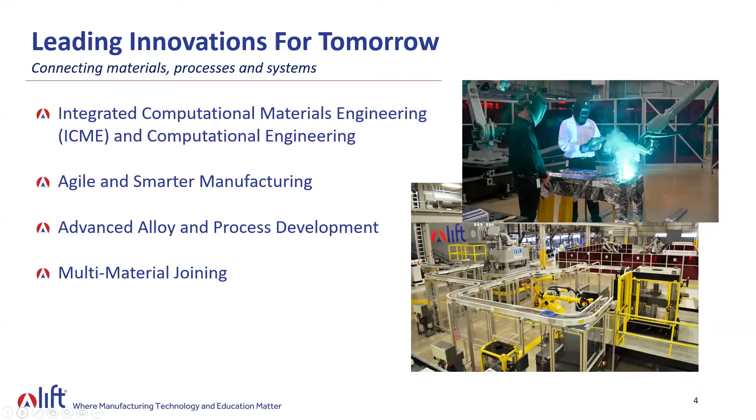Everything from integrated computational materials engineering to agile and smarter manufacturing, advanced alloy process development, multi-material joining. You can see on the screen here, I won't get into each of these, but these are deeper dives into each of those pillars and kind of where we and our ecosystem operates.

So we invite you to come to our facility when it's safe to do so, visit with our technicians, reach out to us and talk to our engineers, learn about what we're doing here, and to really take innovations from research across the Valley of Death and into commercialization.

On the talent side, Learning Innovations for Tomorrow, it's still about innovation and new learning tools, pathways, and venues. It revolves around our Ignite Mastering Manufacturing curriculum, available for high school students in our Learning Lab and around the country. You see the Learning Lab photo there. It's perched above our high bay, where before the pandemic, we had about 120 students each and every day coming to participate in our facility and in our Ignite curriculum.

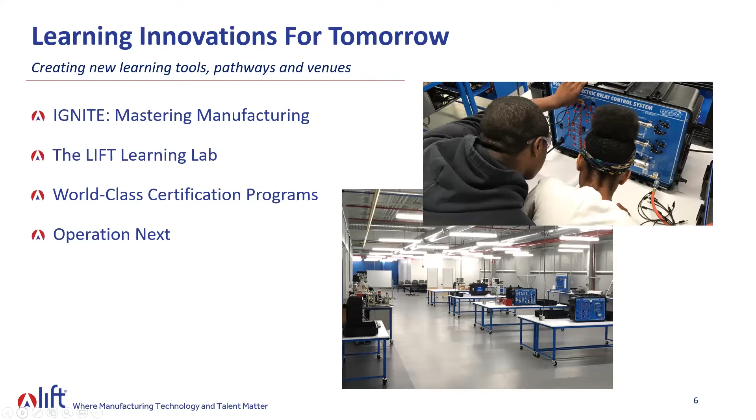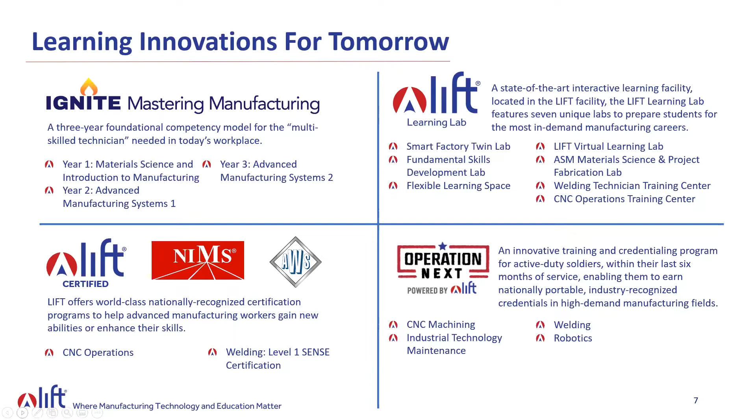We're also offering world-class certification programs - welding, CNC, industrial technology maintenance, and robotics - both through our LIFT certified program and Operation Next program, which is growing beyond just a military program where we're supporting separating men and women from the military, providing them opportunities to earn credentials before they leave the service. We're piloting that in industry right now in response to the pandemic, continuing to train and educate folks going forward.

So I mentioned we are a membership organization, nonprofit 501c3 based here in Detroit. So what do members get from becoming a LIFT member? Well, everything here on the screen. I won't get into each of those today, as I know we want to get into the presentation, but we'd be happy to talk to you about any of those - from our trusted advisorship to our technology and talent development, our showcase, which I hope you guys can come visit soon in Detroit, connecting. But we are here to connect and convene.

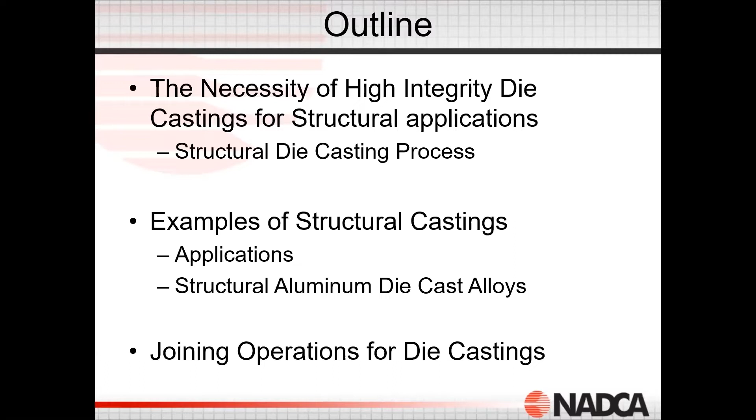Today my outline, what I'm going to review is why do we have to have structural die castings? What's driving the need for structural die castings in the industry? I'm going to talk about some examples of those structural die castings, some applications and specific castings. And then when we're looking at structural die castings, one of the benefits is in joining operations, in hooking those castings up to other components.

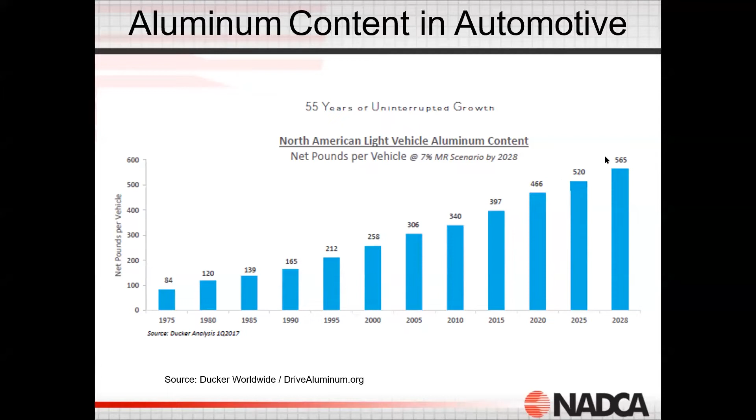So the need for structural die castings comes from several sources. One is just the lightweighting and aluminum content. We can see on a graph like this from Ducker that the amount of aluminum in vehicles is ever increasing past 2020, 2021, all the way to 2028. So castings are necessary in making vehicles lighter. So we see that aluminum content increasing, and then we see that aluminum content in various structural components inside the vehicle.

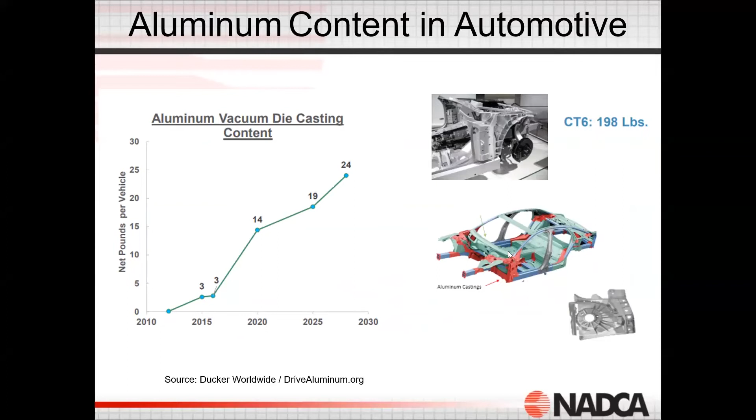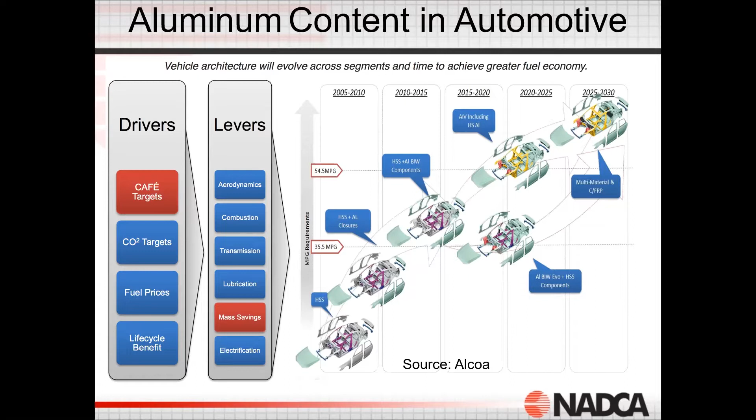And then within that, we also have CAFE targets. Those CAFE targets are requirements from summits or from legislation that happened in 2012, increasing the miles per gallon of the entire fleet. So in reaching those CAFE targets, they've got to make the vehicles lighter. So we have the aluminum content increasing, we've got the vehicle getting lighter and lighter, but the strength, durability and reliability of the vehicle in a crash environment still has to take place.

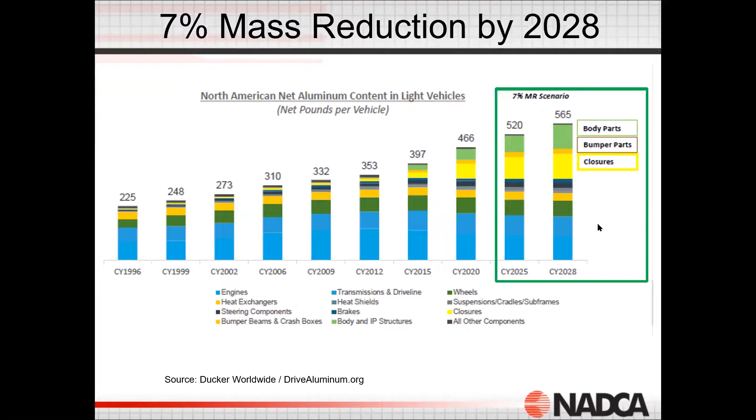So with that, we have an overall reduction in mass of 7% targeted by 2028. This goes back to that number of pounds in a vehicle, pounds of aluminum, and we can see where that's coming from - the engine, transmission parts, brakes, wheels, and all other components. Within this, we have the structural components, which make up a large majority of growth components in the die casting environment being applied to vehicles.

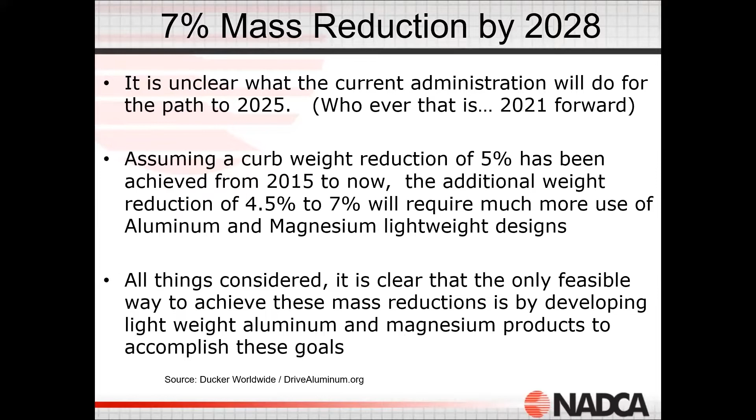So it's unclear whether the current administration is really going to take hold of this and how that's going to drive us to 2025. But the past legislation from 2012 is still in place. That hasn't changed under the previous administration, and it's not changed under the current administration. So as we move forward, we have to see these targets, because those CAFE requirements are ever looming, driving us to reduce the weight of the vehicle and increase the miles per gallon of the vehicles. So that's what's kind of driving us forward, making more products into structural die castings.

So what is a structural die casting? I want to get into the process. When we're talking about structural die castings, we're not just talking about a standard die cast process. We're talking about a die cast process that then has additional parameters and items in it that make a structural die casting what it is.

So the first is going to be high vacuum. In a structural casting, we're going to have high vacuum capability, and this type of process needs to be able to achieve a vacuum level of about 50 millibars to 100 millibars. With that kind of vacuum draw, we're eliminating a lot of the air inside the system. We've got to be able to monitor that, and monitor it in real time.

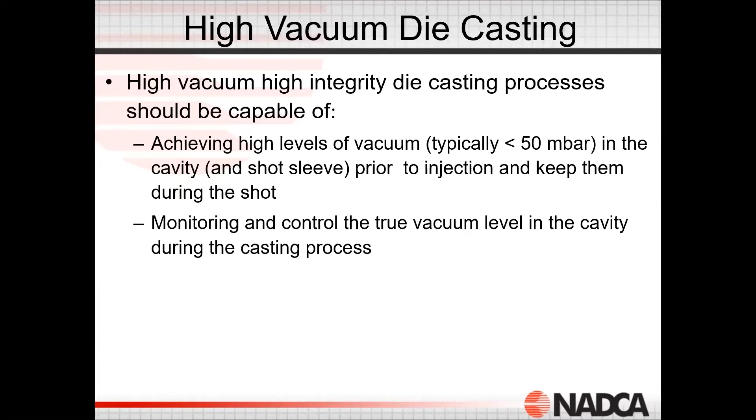So when you're making a die casting, you're injecting the aluminum at high velocity. You can fill a casting, whether it's 2 pounds or 75 or 80 pounds, in a time frame of about 49 milliseconds to about 90 to 100 milliseconds. So in 0.1 seconds, we're filling a 70-pound die casting. That injection speed is very rapid, and solidification takes place very rapidly. So we've got to have systems that are able to monitor and control not only the shot parameters and all the other parameters of the die cast process, but the vacuum systems and humidity control or monitoring systems as we inject the aluminum into the die cast machine.

When we produce a casting from a high vacuum process and produce a structural casting, these castings have extremely low levels of porosity. These castings can be solution heat treated without blistering. They're weldable. They have good uniform mechanical properties.

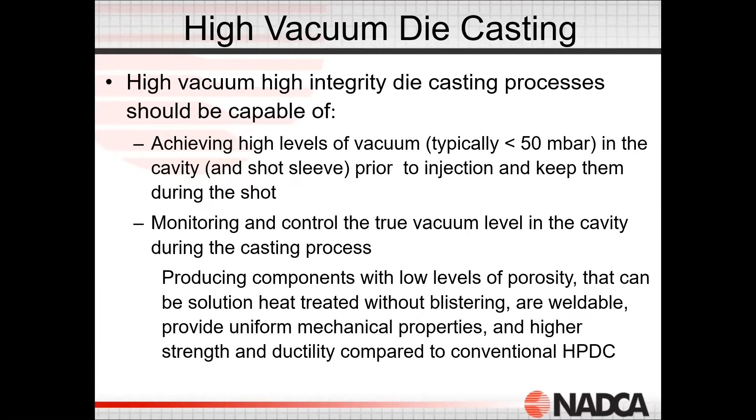They have higher strength as compared to standard high pressure die casting. So we get some good mechanical properties, and ultimately they have better elongation. With that better elongation, they have durability in crash tests, bending instead of breaking and snapping. So why use vacuum die casting?

We want to reduce the gases in the shot sleeve and in the cavity, thus reducing porosity levels and improving mechanical properties, making them heat treatable. We want castings with uniform and very small wall thicknesses, meaning 3 to 5 millimeter walls, so we can get the same type of strength, durability, and elongation out of a casting with a 5 millimeter wall as one with a 10 or 12 millimeter wall.

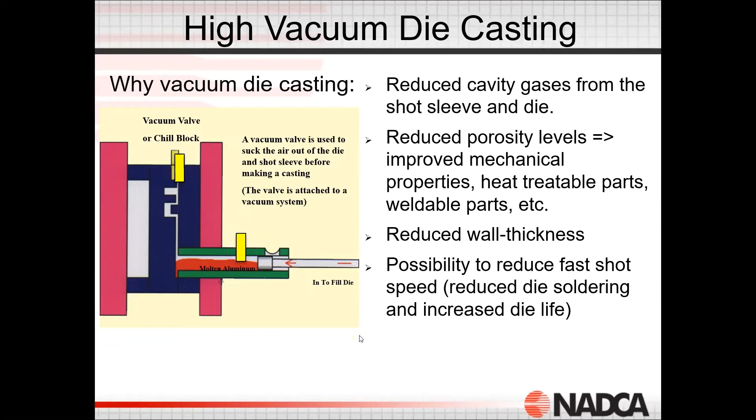Ultimately, we want to be able to produce these aluminum castings out of various aluminum alloys. There have been structural alloys developed for the entire process to give us unique properties based on the alloy within this high vacuum process.

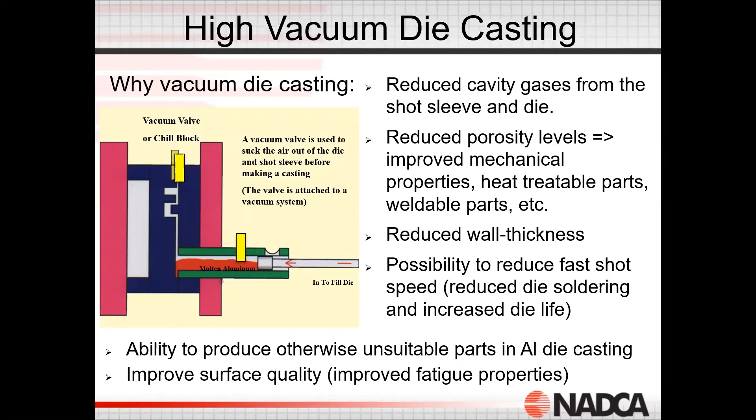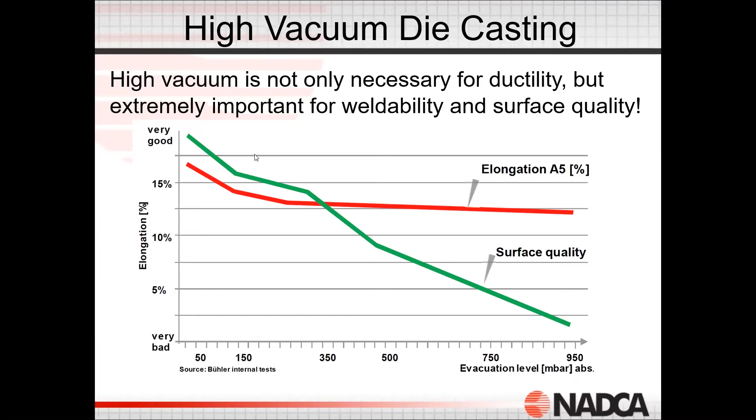This is a graph showing the elongation value, higher elongation over the evacuation level. We can see that if we don't get good evacuation levels of the gases, so we have low vacuum or vacuum assist, we get lower elongation values, whereas we get higher elongation values with very low evacuation pressure. This is a higher vacuum level, and this is a lower vacuum level. The better the vacuum in our molds, the better the elongation from the alloy, plus the individual alloy properties, which we'll talk about in a little bit.

Ultimately, we have a die cast process, and this is called a shot profile. With this shot profile, we're taking a fingerprint of the individual shot that's making an individual die casting. We have the slow shot injection speed, and then we start the vacuum. We draw the vacuum, and by the time we reach the end of slow shot, we've achieved a 50 to 100 millibar vacuum.

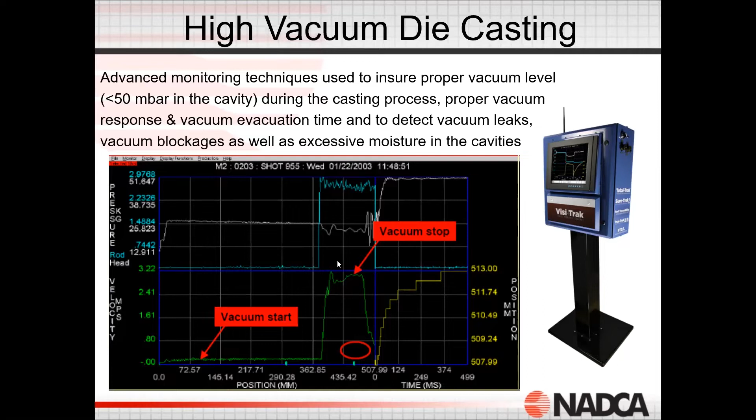Then we enter into fast shot. We have to stop the vacuum as we reach the end of shot so that we're not filling the vacuum systems, and then we enter into an intensification phase. We look at these shot profiles and we can tell whether we're getting a good casting. Within those profiles, we can not only measure the vacuum levels and the shot, but we can also measure the humidity levels, so we can actually determine if we have excess humidity creating porosity in the die casting.

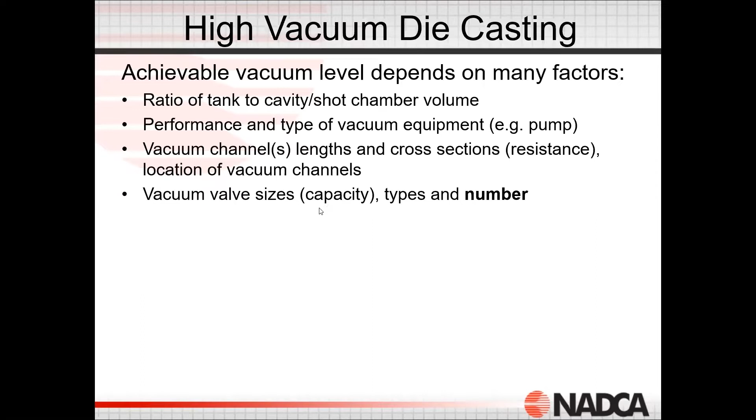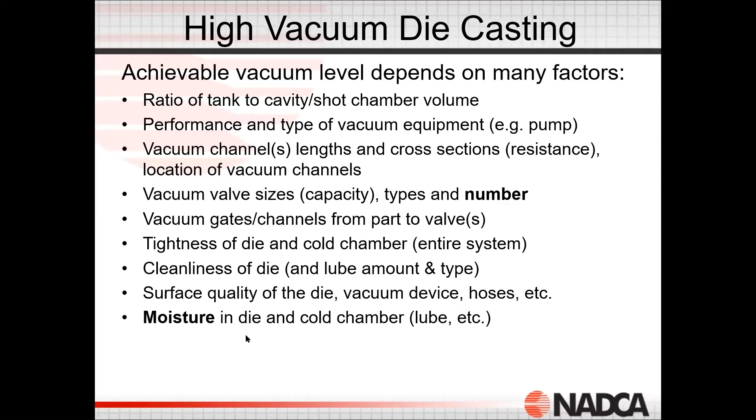We've got to have vacuum systems, runners, lengths, and vacuum valves all capable of removing that air very rapidly while we're filling the casting, to make sure we have a very tight process. We also have the entire tool sealed. The tool has to be clean, meaning it can't have any die lube or any excess liquid inside the machine while we're making the die casting. This is the moisture in the die, and when we're controlling that moisture, we have the tool completely sealed.

This is a side view cutaway section of a die cast die. This is what we call the cold chamber or the shot sleeve. The metal is put in here, and I'm going to show you this in more detail in a minute. The metal is injected, and this becomes the cavity. We can see all of these seals. These die seals are necessary if we're going to seal this tool.

When we draw a vacuum, we're not just pulling in outside air and replacing the internal air of the cavity with external air from the outside world. We've got to have all of the components sealed, the entire tool, and all the moving components in what we call the ejector half. These seals are important to keep out moisture, and they're important to keep out any air from being drawn into the cavity.

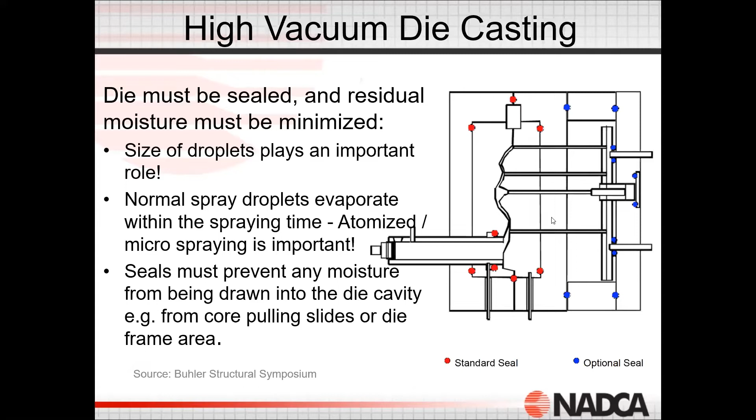This is once again a fingerprint, actually a snapshot of the vacuum system in operation. So here we're not only looking at the humidity level, we're looking at how well we're drawing a vacuum. We turn the vacuum on, draw it down, and we're achieving about 50 millibars in this particular die, and each one of these is a shot, a die casting being made. We're monitoring the vacuum level and the humidity level, and these humidity sensors are located at each vacuum point.

Once again, a distinction between structural die casting and vacuum assist or normal die casting is that structural die casting can have multiple vacuum points. So we're going to have 2, 3, 4 vacuums inside of a mold, all drawing vacuum on the same mold, all measuring humidity. We can see the humidity sensors at each vacuum point, and we can measure the vacuum level.

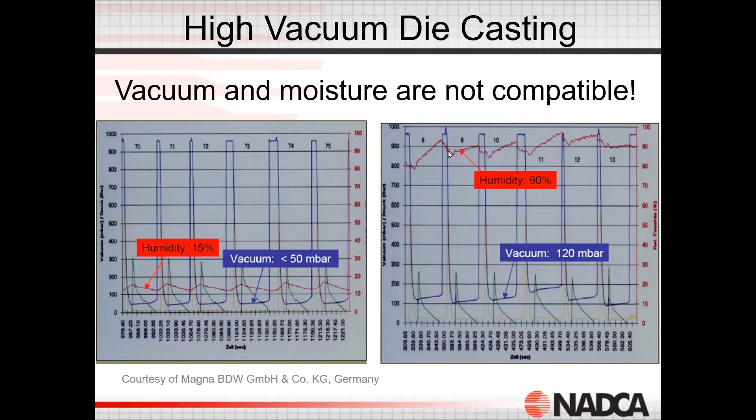So here's the different running criteria. Here we're achieving about 120 millibars of vacuum, once again much higher than here, and we can see our humidity level is around 90%. If I were to see this, I would say I've got a water leak or excess lube. Any humidity of this level is going to create porosity in our castings. Once again, if we can't measure it, we can't control it. So if we're measuring humidity, we can see the difference of 15% to 90%. We're now producing a casting that may have detrimental effects or excessive porosity, giving us blisters and defects.

So we can see that this low gas porosity is very key in making good weldable seams in our joining operations. We're just showing the difference between different types of vacuum systems. This is a high vacuum system, this is a conventional vacuum system, and this is without any vacuum. We can see not only the type of air that's entrained in the casting, but the amount of air in these x-rays. These conditions are going to give us a good weld seam. This is actually the weld seam we're looking at, from the different processes.

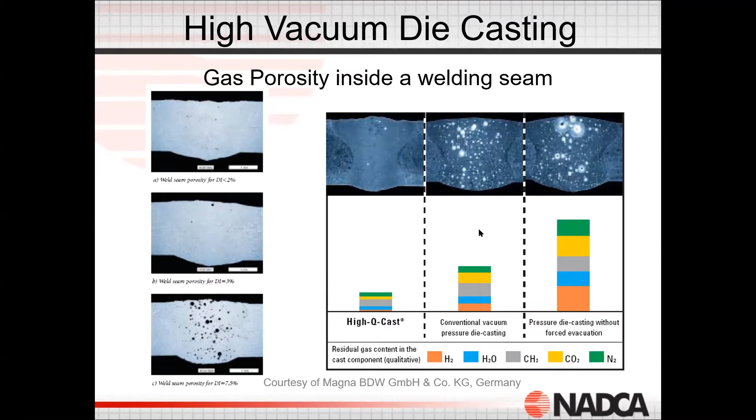So here's how the process works. Through the next set of slides, I'm just going to illustrate the process. We have metal, the red here indicating the material, the aluminum material. It's entering in what we call a cold chamber or shot sleeve. As it enters into that shot sleeve, it fills it to a level - we call that our fill percentage. We then start the piston forward.

This is the injection piston. As the piston covers what we call the pour hole and closes it, we then turn on the vacuum system. We have a vacuum system on the chamber or shot sleeve, and then a vacuum system in the mold going to vacuum tanks. So we have a large vacuum reservoir that we turned on, and this is now moving forward - the metal is moving forward into the cavity. As we pass this point where the vacuum in the chamber is, this vacuum is shut off, and we have these vacuums in the die still on.

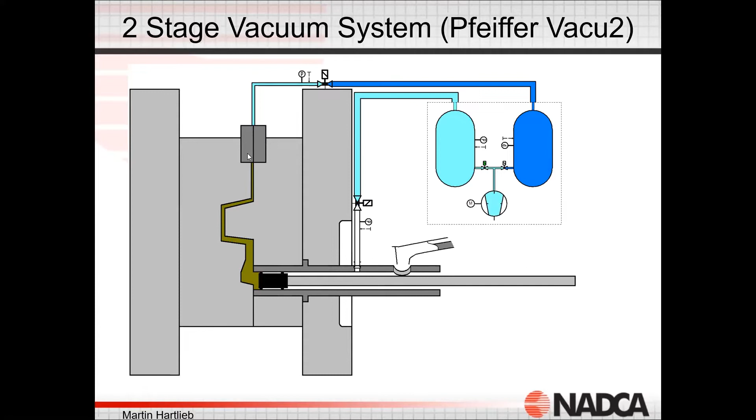So we're still drawing vacuum here, this one is turned off. The metal is now entering the cavity shape, fills the entire cavity shape, and then the vacuum system turns off as it reaches the top vacuum point. There are several ways that's achieved. With that vacuum off, the mold is now filled, the casting solidifies, and we pull the casting out of the mold, and the process repeats. So that shot fill time, once again, is between 0.049 seconds to about 0.09 seconds or 90 milliseconds - very rapid filling.

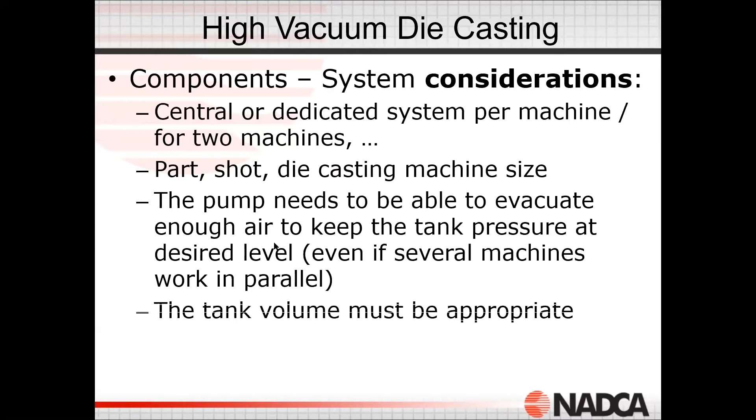A lot of considerations need to be taken into account when we're casting these parts - what kind of machine we're going to cast it in, what's our part, our shot, our die casting machine size, what kind of pumps do we need to evacuate that amount of air. So based on the volume of the casting, whether we're making a small casting or a very large casting, we have to have this thing sized appropriately to be able to pull all of the air out of the process. And once again, we've got to have the shot sleeve evacuation.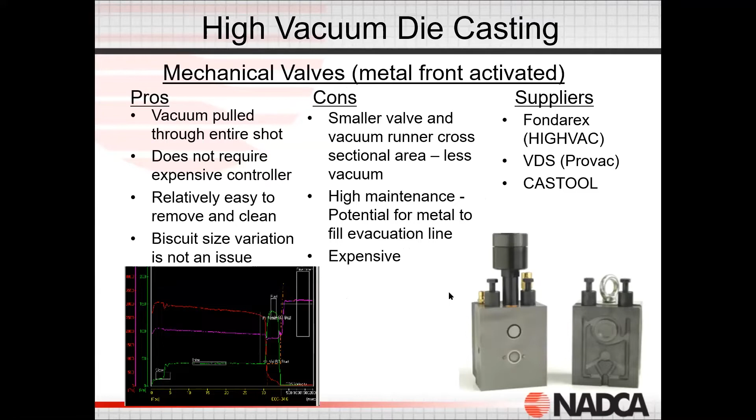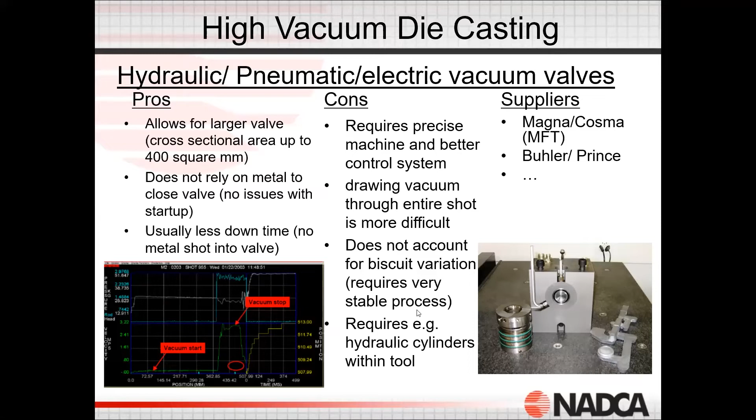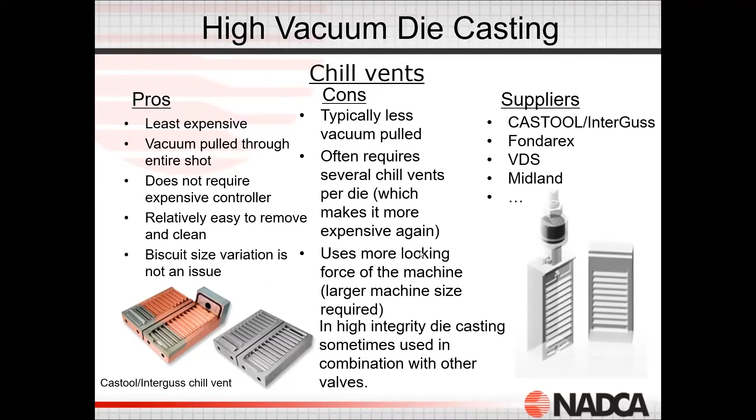So here's some valves that are used. These are vacuum valves, and there are several different types. There are metal front valves, there are poppet valves - each one of these are different vacuum systems. There are different pistons for injection. There are blocks that are called chill vents that we have vacuums attached to. So all of these are different systems for removing the air from the die casting.

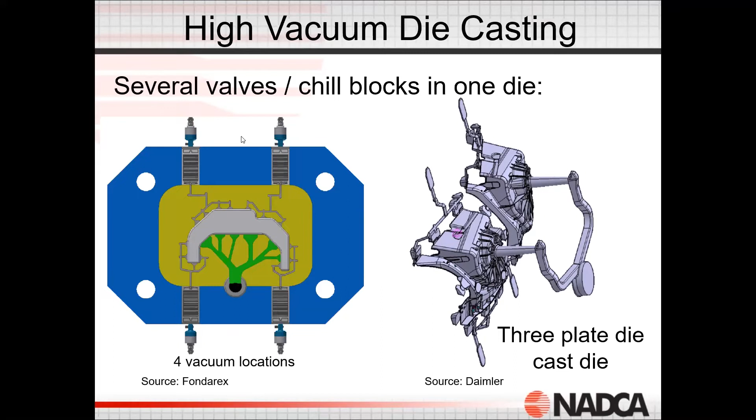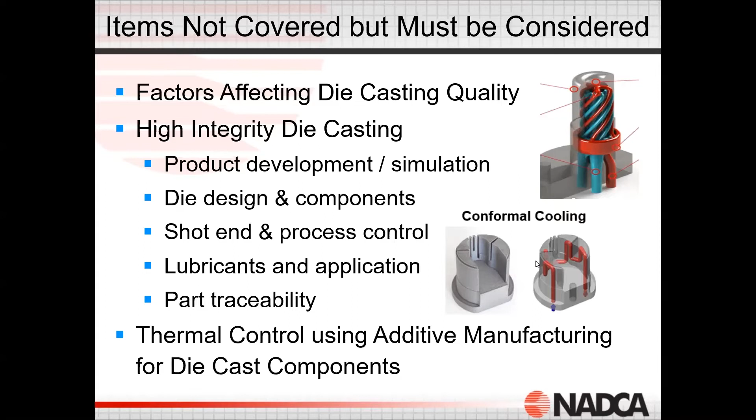And then we've got to have some sort of thermal control. We utilize that thermal control by using additive manufacturing. So whether we're using additive in a shot block or in a core, we're printing these, and we're actually printing the cooling lines at various shapes and sizes to facilitate the cooling and thermal control inside the casting to eliminate different types of porosity that are going to exist.

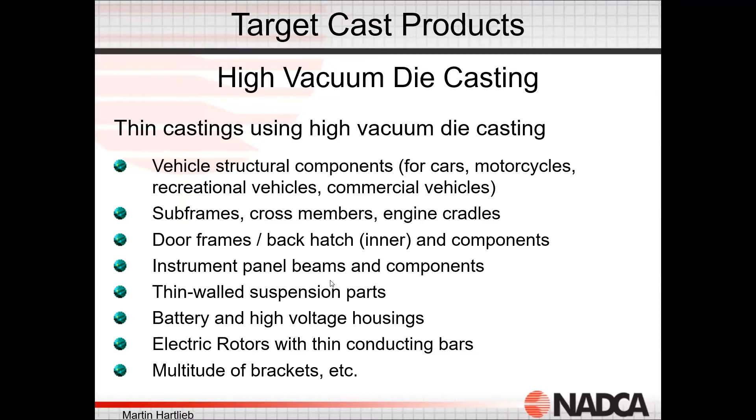Examples of die castings being used include vehicle castings, for cars, motorcycles, recreational vehicles - subframes, cross members, engine cradles, door frames, instrument panels, thin walled suspension parts, battery and high voltage housings. For the EV market, electric rotors, and then there's a multitude of brackets. This is a list of castings being produced as structural castings today.

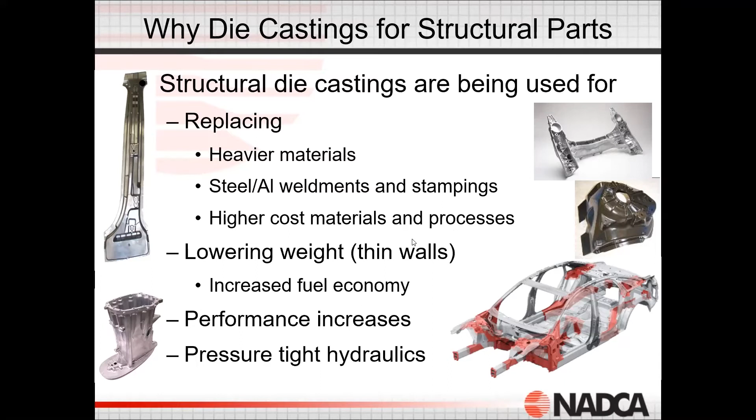Some of the advantages of structural castings is that we can replace heavier materials - stampings and other steel type materials, or steel aluminum weldments. We can replace other high cost materials with lower cost, lower weight, thin wall aluminum die castings. So we get better performance and better pressure tight castings with this type of process.

Remember, these castings have high elongation, so in a crash we're going to see these castings buckle and not break. These castings have very thin walls.

We then integrate several different parts into them, and I'll talk about that in just a moment. These have good mechanical properties, higher than normal die castings, giving us good crash performance. They can be welded, they can be riveted, they're distortion free with tight tolerance, and with some of the alloys being developed for structural applications, they have great corrosion resistance, and obviously pressure tightness.

Here's an example of an Audi B-pillar. This used to be 8 different parts weighing about 9 pounds; making it into a structural die casting, it now weighs about 5 pounds and is one casting - eliminating the assembly operation and all the other components.

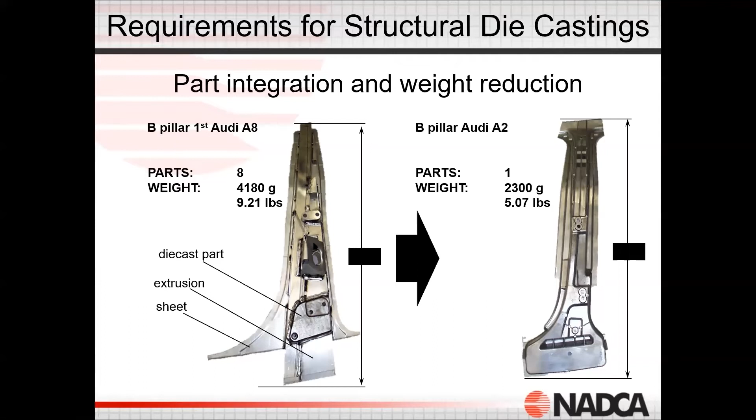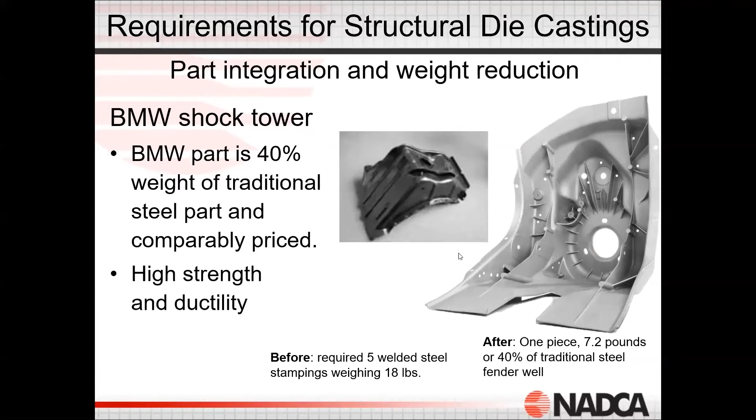Here's a BMW shock tower. This was traditionally 5 welded steel stampings weighing about 18 pounds. As a die casting, it's now 7 pounds and a single piece, so it's 40% of the weight of the traditional welded part.

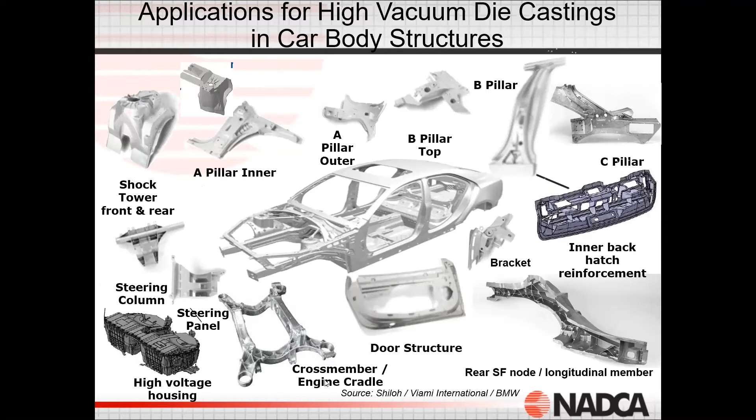Here's an overview of all the different components being die cast today as structural die castings. So not only do we have the shock towers and B-pillars I just showed, we have A-pillars, C-pillars, inner back hatch, brackets, door structures, cross members and cradles, high voltage battery housings. All of these are being cast today as structural die castings, replacing other traditional components.

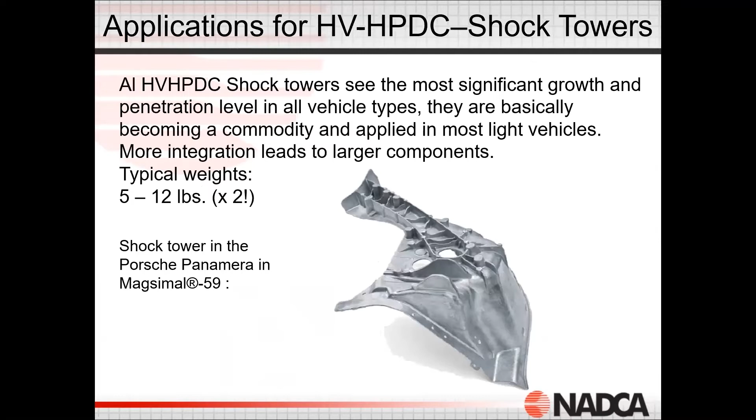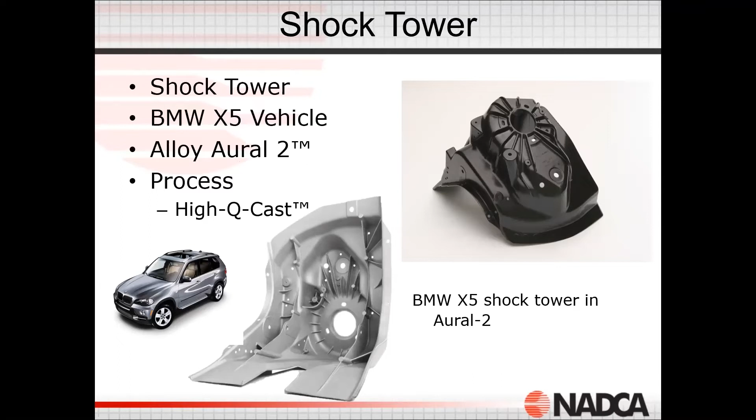The alloys now being used - this is an Aural 2 alloy. As I mentioned, there are several alloys that have been used for several years, and there are also alloys in development to enhance the properties of structural die castings. Here's 2 different alloys: this is a Castasil 37 made by Rheinfelden, and a Silafont 36, both structural die castings replacing stampings.

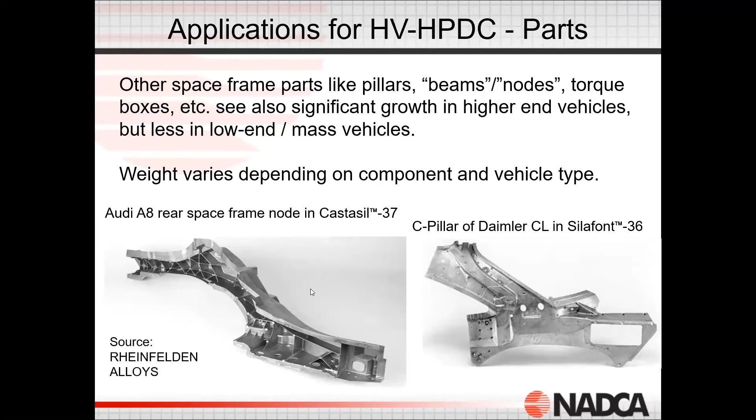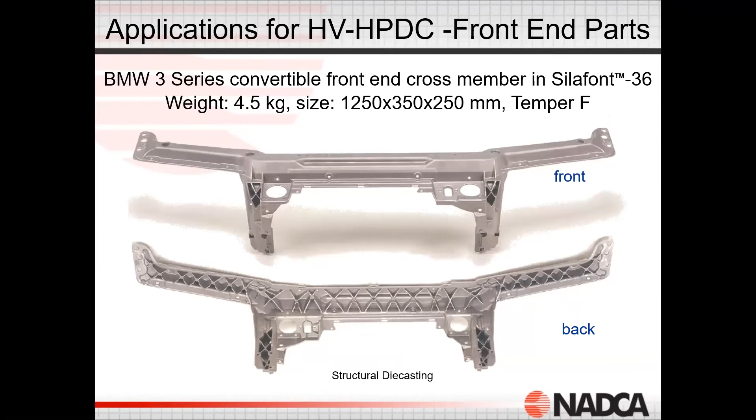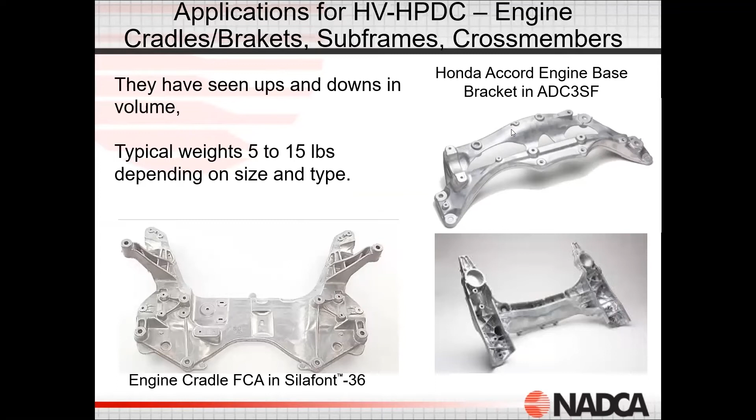Other castings being done today are engine cradles made of Silafont 36, and an engine base bracket made by Honda. As I mentioned, battery trays - these are coming in various shapes and sizes. In today's world, like what Tesla is doing, they're now integrating the battery tray as part of the structure of the car. It's not just a component sitting in the car, it's now part of the structure of the vehicle. It becomes part of the frame, and the batteries lay inside that framed structure.

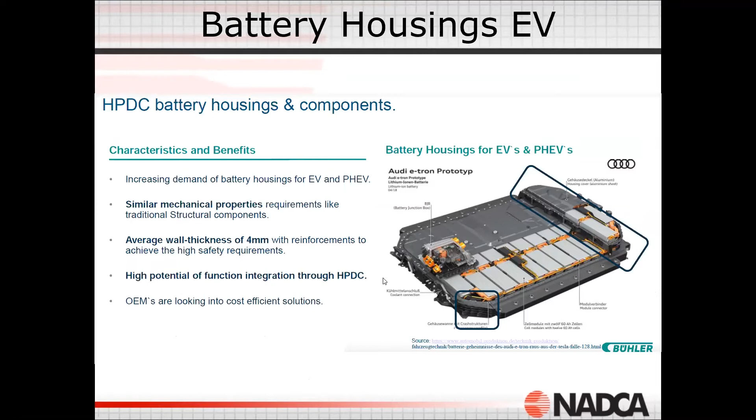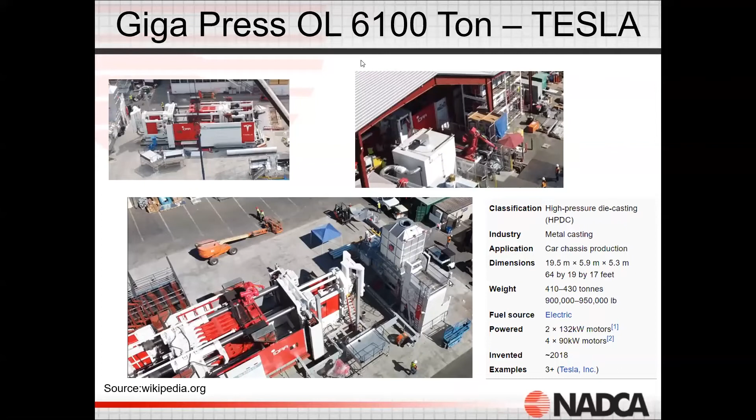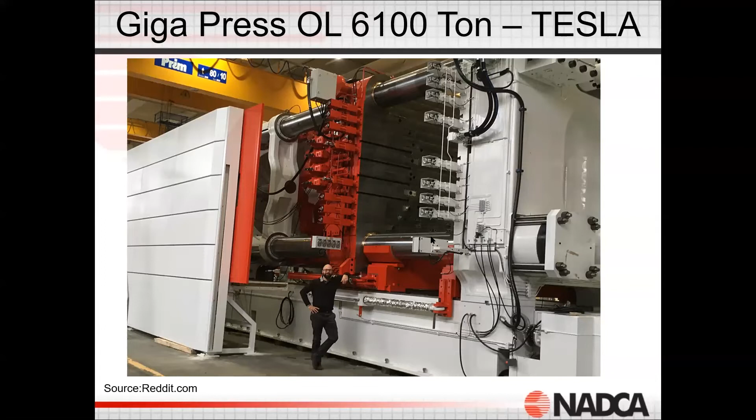Speaking about Tesla, one of the developments that have happened in the recent past couple of years is the size of the machines ever increasing. This is a 6,100 ton die-cast machine. To give you an example of the size, you can see a man standing here, and he's barely coming up to what we call the shoe of the die-cast machine. Tesla has named it the Giga Press, and with it they're making the rear end as an entire single die casting of a vehicle.

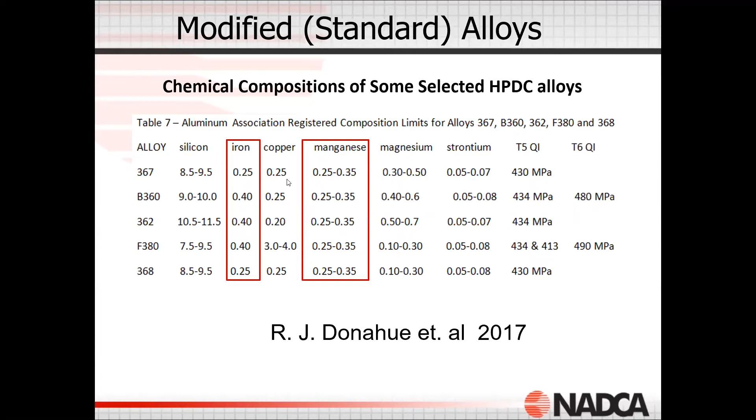What I've outlined here are the iron and manganese levels, because in these alloys we're maintaining silicon levels to give us good fluidity, but dropping the iron level and controlling the manganese to give us castings that are less brittle and higher elongation alloys. The iron and manganese combine to enhance die life. We're adding magnesium for strengthening, and strontium is added at certain levels for silicon modification—modifying the silicon in the aluminum from a needle-like structure to more of a nodular structure.

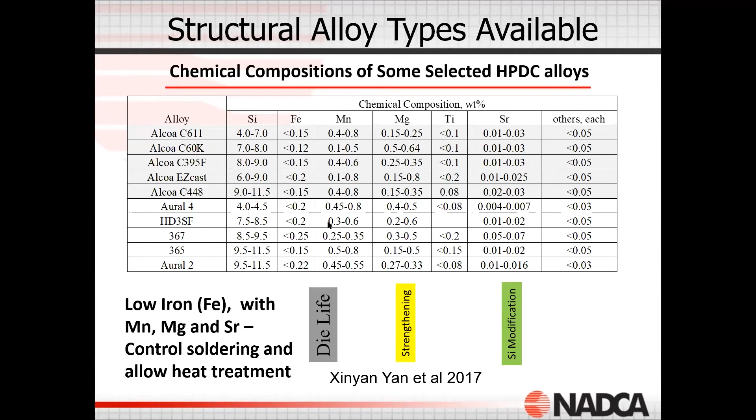These are some of the alloys I mentioned a few minutes ago in those applications: Silafont 36, Castasil 37, Aural 2, Aural 3, Aural 5. We can see these alloys all have a silicon range anywhere from 7% up to about 11 or 12%. They're controlling the iron and manganese, with very low iron levels—0.15, 0.25, 0.13.

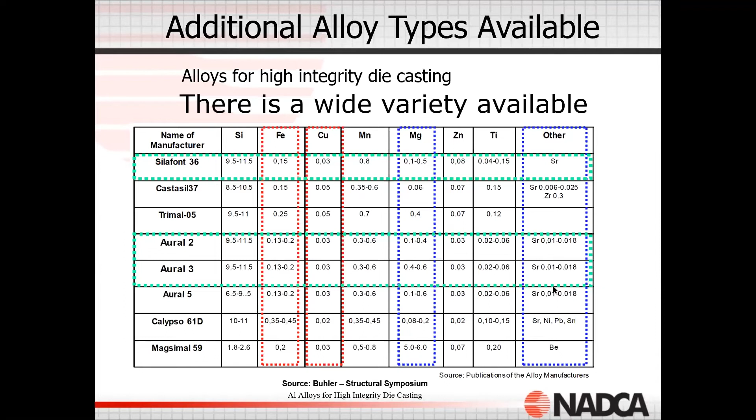Controlling the manganese levels, and very low copper—I mentioned these have great corrosion resistance because we're limiting the amount of copper in these alloys. We're adding in magnesium for strengthening, and modifiers like strontium to help modify the alloy to give us good fluidity while filling those castings.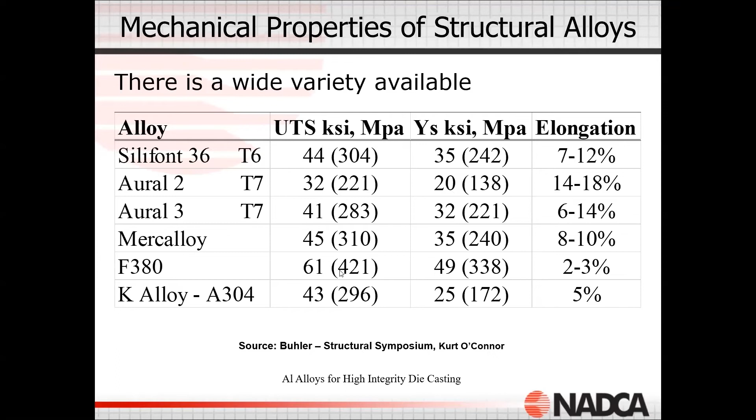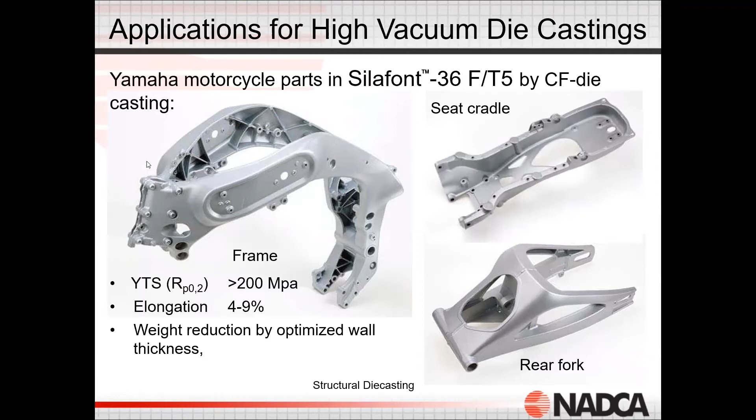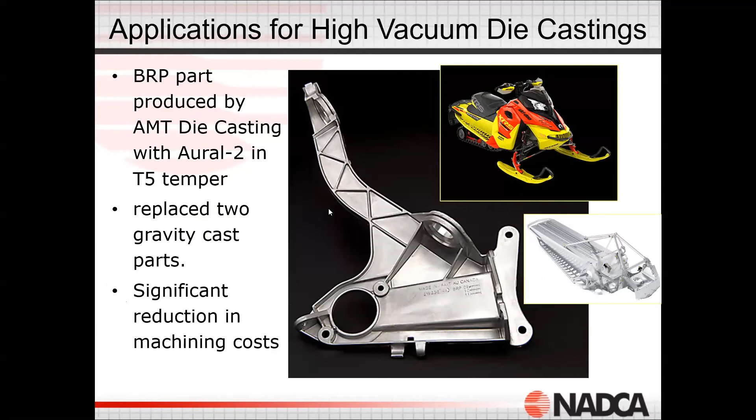Other applications are in the trucking industry, so heavy trucks using a Silifont 36, and motorcycle frames for Yamaha. These are structural die castings—seat cradles, rear forks—all structural die castings for the motorcycle industry, for motorbikes for Yamaha, seat frames, and parts for snowmobiles. So these parts are reaching across various industries, replacing heavier components or multiple components with a single die casting.

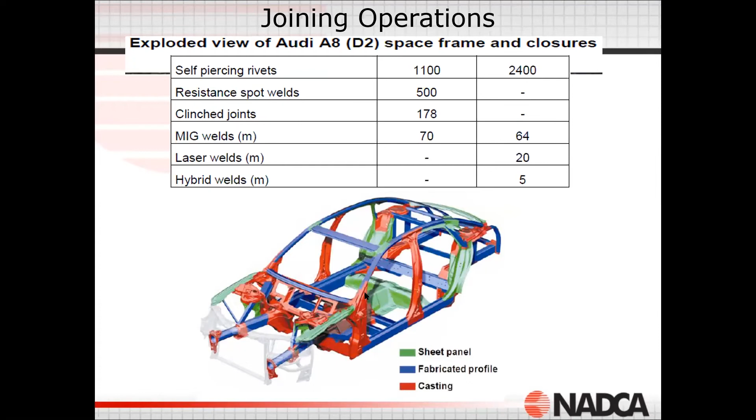When we're looking at these castings, we have to use joining operations to bring them together with other components. So we use riveting, spot welds, clinching, MIG welding, laser welding—all different processes for bringing together these components.

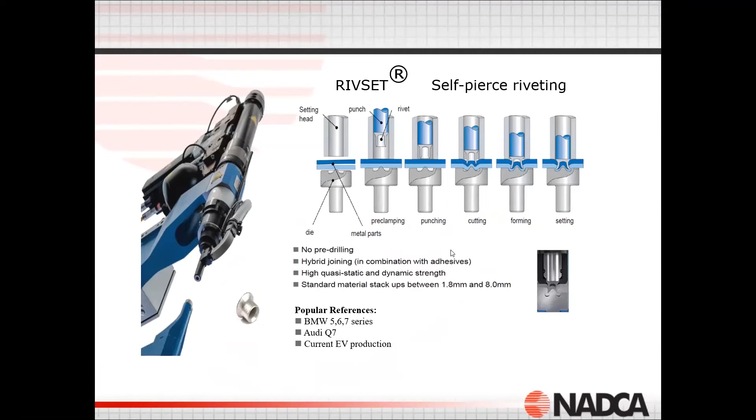One of the projects NADCA is working on is riveting, and we're working with Böllhoff, a company, to help further develop the riveting of aluminum castings. Riveting has been around for many years, and we're looking at improving that so the riveting of these structural alloys is more uniform and more reliable. A component like the Ford F150 has between 2,200 and 2,700 rivets that join all the different aluminum components together.

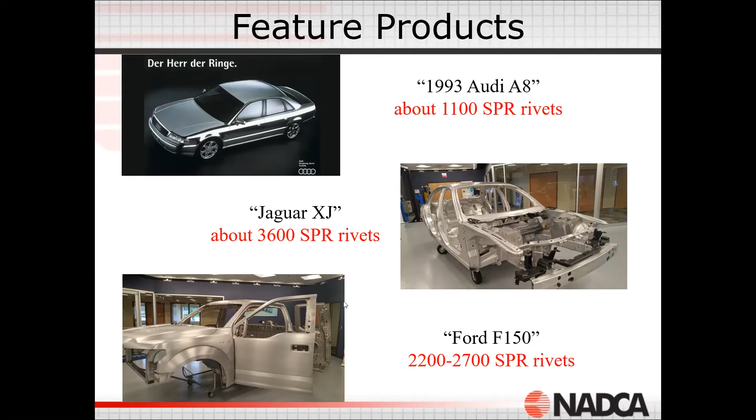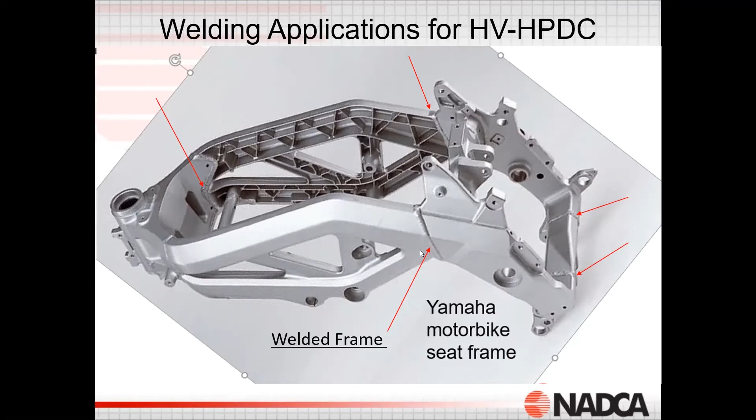Along with riveting, the other joining method is welding. We're welding high vacuum, high pressure die castings together. In the past, when you tried to weld a standard die casting, that weld would fail—it wouldn't give us a good weld. In this case, we're now welding different die castings together, two different die castings, or welding die castings to other materials.

So this piece and this piece are die castings, and we're welding those to different types of materials. We've got either hydroform or extruded aluminum that's being welded to a die casting here and a die casting here.

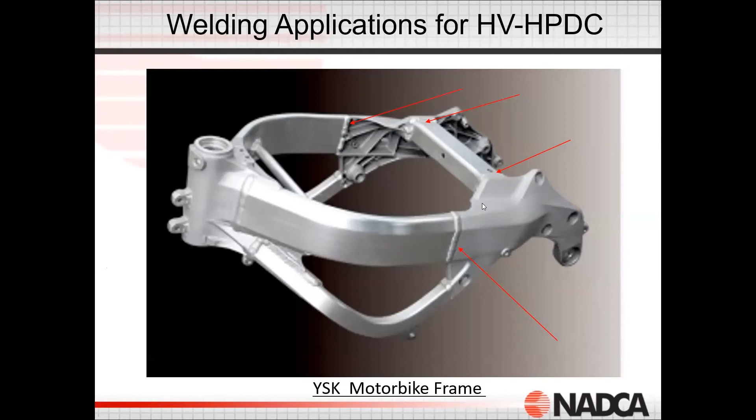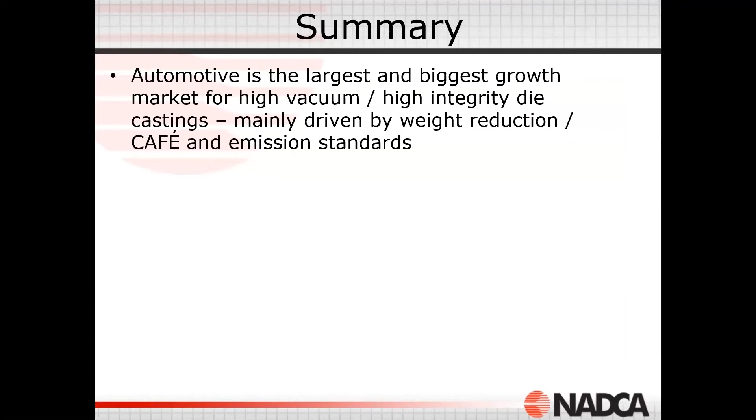So in general, the automotive market is the largest and biggest growth market for high vacuum, high integrity die castings. It's mainly driven by CAFE standards and emission standards. We've got to make cars lighter to give us better fuel economy. We're going to do that by replacing heavier steel components with aluminum components, as long as those aluminum components can meet the same performance requirements as the components they're replacing. Other markets are motorcycles, recreational vehicles, boats, trucks, and other niche markets.

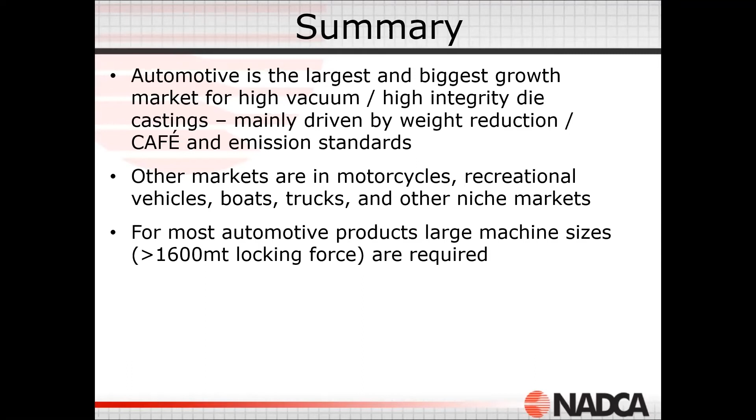For automotive products, we're seeing these machines get larger and larger. Most structural die castings are made today in 2,500 ton, 3,500 ton, 4,400 ton die cast machines, very large machines. We've seen pictures of the 6,100 ton machine, Tesla's calling it the Giga machine. And I know there are several more of those machines on order to go into the industry.

Because they can make much larger castings using the same structural process, the value added by combining these castings far exceeds traditional die castings and far exceeds all the other components. So making 79 parts into one single die casting. Every 3 to 5 minutes, you're getting a part out that doesn't have to be assembled, doesn't take up additional floor space, and still meets the performance requirements of all those other components. That's what structural die castings can do for us today.

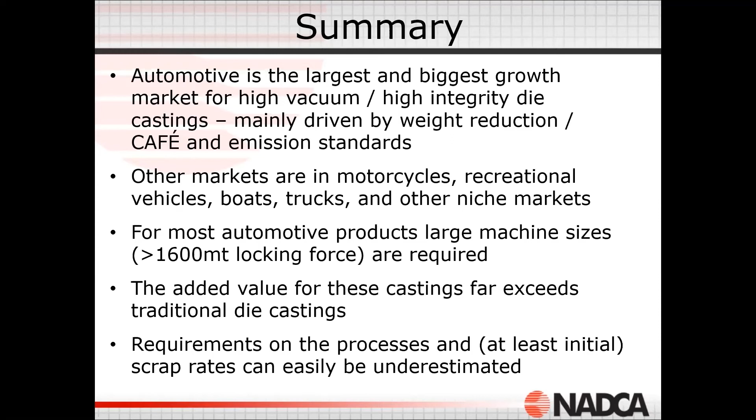We just need to understand that when we're quoting this, when we're casting these parts, we can't underestimate potential scrap in the system, and we have to take into effect that this process is very tightly controlled. Any kind of variation in this process is going to create scrap. So we can't underestimate what we need to do and the process control we need to be able to make a high vacuum structural die casting.

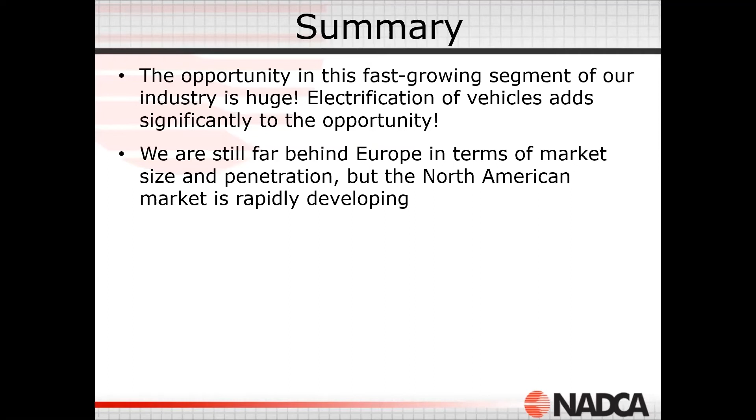This is a fast growing segment of the die casting industry, along with the electrification of vehicles. This is going to add additional opportunity to other die cast manufacturers. So we're going to see lighter vehicles, and we're going to see more components made into structural castings. More programs are going into this, and the supply base is still growing.

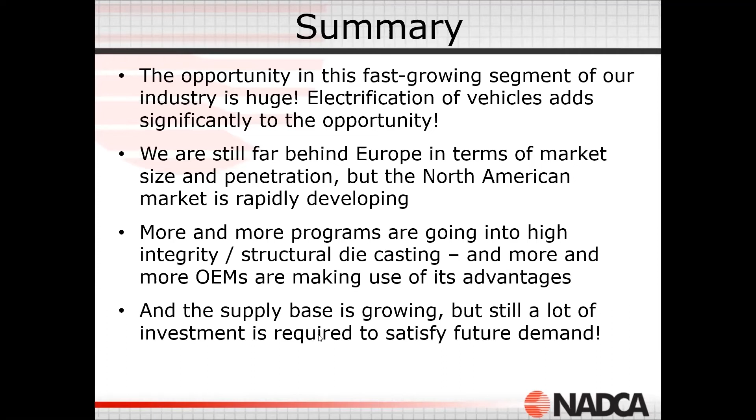If you want to learn more about this, NADCA has several publications on the standards for high integrity and structural die casting processes, product standards for semi-solid and squeeze casting. We've got books on high integrity aluminum die castings and then high integrity castings. Several different resources you can use to enhance your knowledge or understanding of the structural market, its capabilities, and the capabilities of those individual alloys with this type of process.

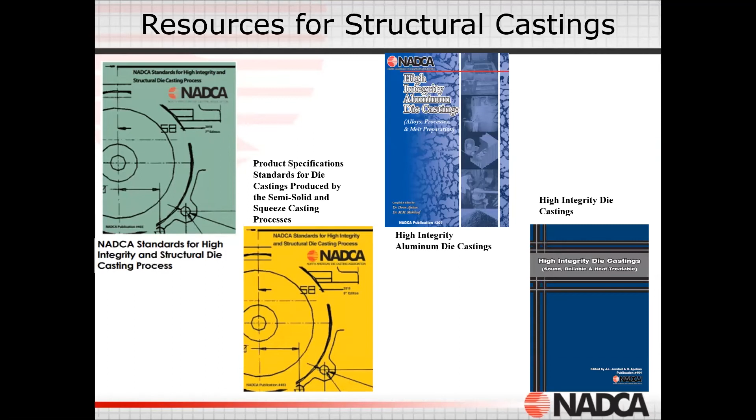I want to thank everybody for coming today, and I want to open this up to questions for either Steve or myself to answer.